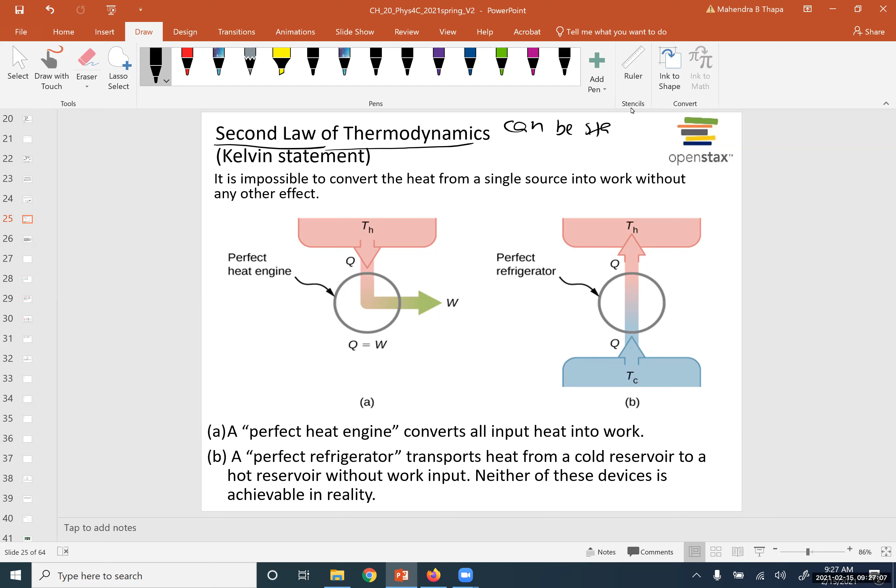I'm starting with second law. So you see here, second law can be stated in many ways. Okay. So right here it can be stated in many ways, but the main concern of second law is this.

Here the second law is that net heat flow is from high temperature to lower temperature without doing any external work.

Okay, it means heat cannot flow from low temperature to high temperature without doing external work. Okay, so in general heat flows from high temperature to low temperature. So it can be stated in many ways. The first statement is this Kelvin statement.

It is impossible to convert heat from a single source into work without any effect. That means we cannot produce this kind of perfect heat engine that converts total heat into work. So this is impossible. Okay, this kind of engine is impossible.

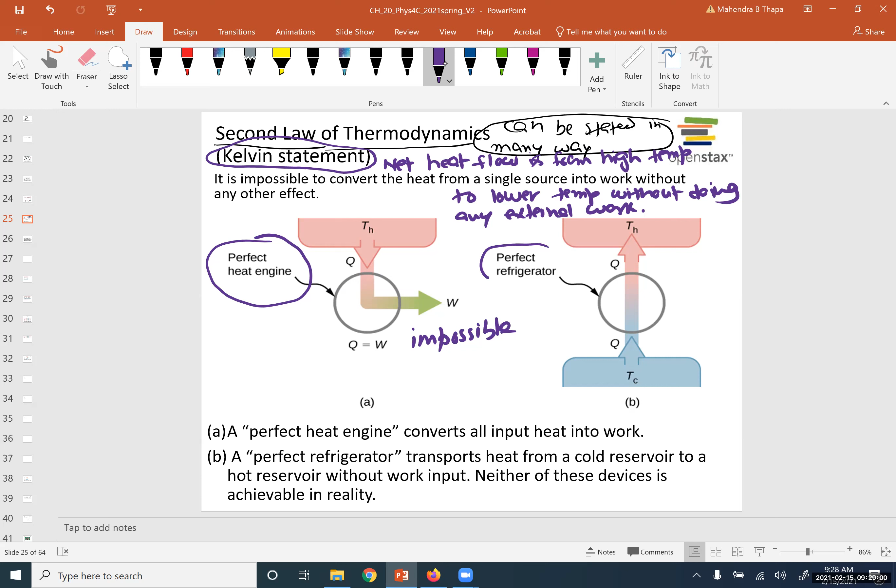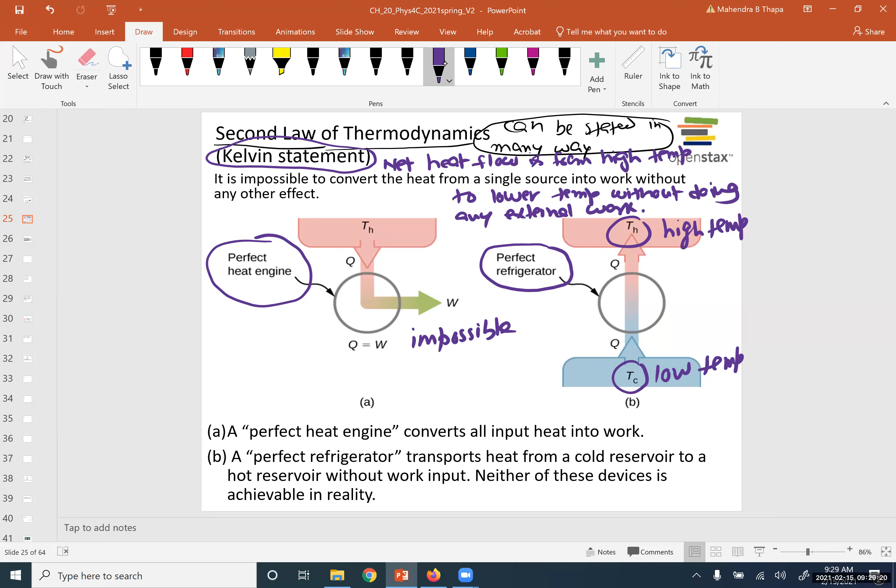Similarly, we cannot have that kind of perfect refrigerator that transfers heat from low temperature to the high temperature without doing extra work. Okay, so this means the 100% perfect engine is not possible. So this is basically talking about this thing.

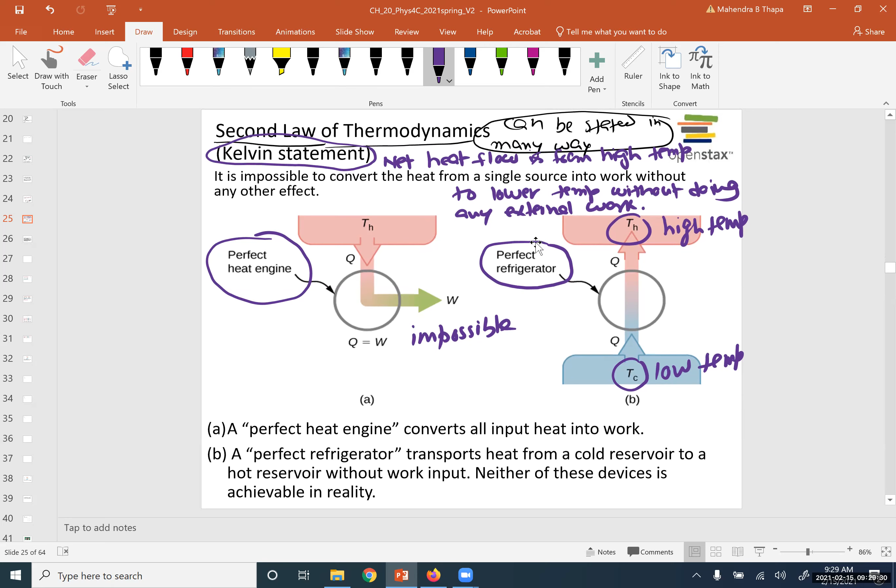Okay, another statement is called the Clausius statement. It says that heat never flows spontaneously from cold temperature to high temperature. Okay, so these statements are the same. They are not different statements; the meaning of both statements is the same.

So in summary, we can say a 100% efficient engine or refrigerator is not possible. You cannot produce this kind of machine.

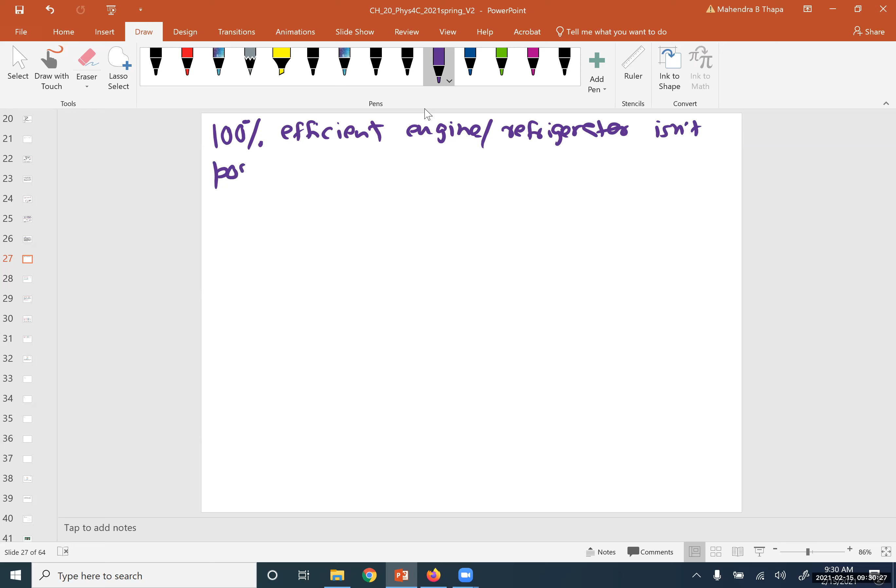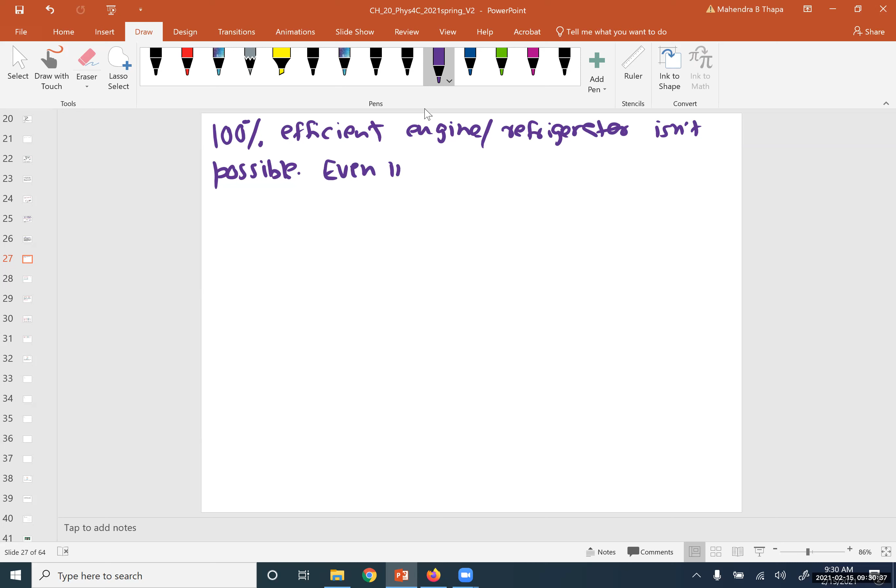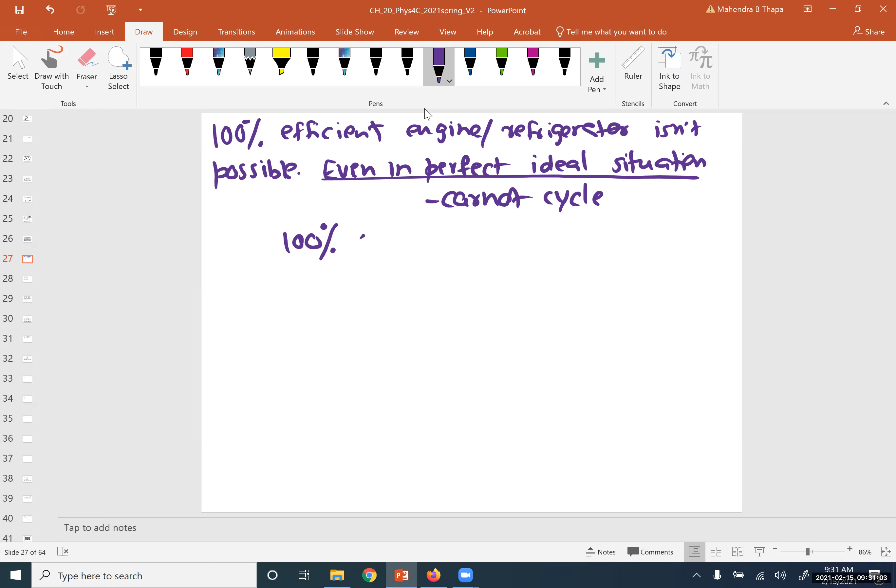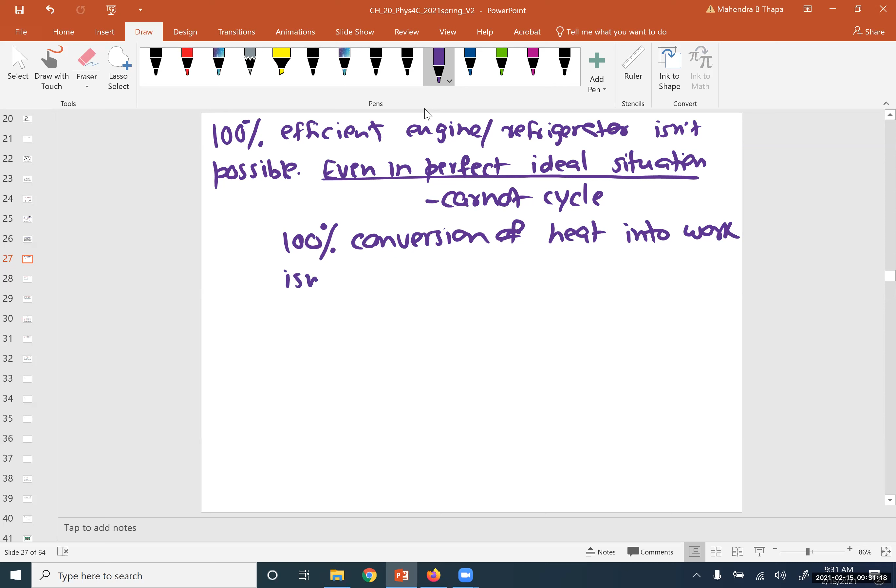Okay, so even in the perfect ideal situation, we come across this situation. This is called the Carnot cycle, Carnot engine. Even if we consider the perfect ideal situation, we'll see soon that 100% conversion of heat into work is not possible. Okay, this will not be possible. We come across this point very soon.

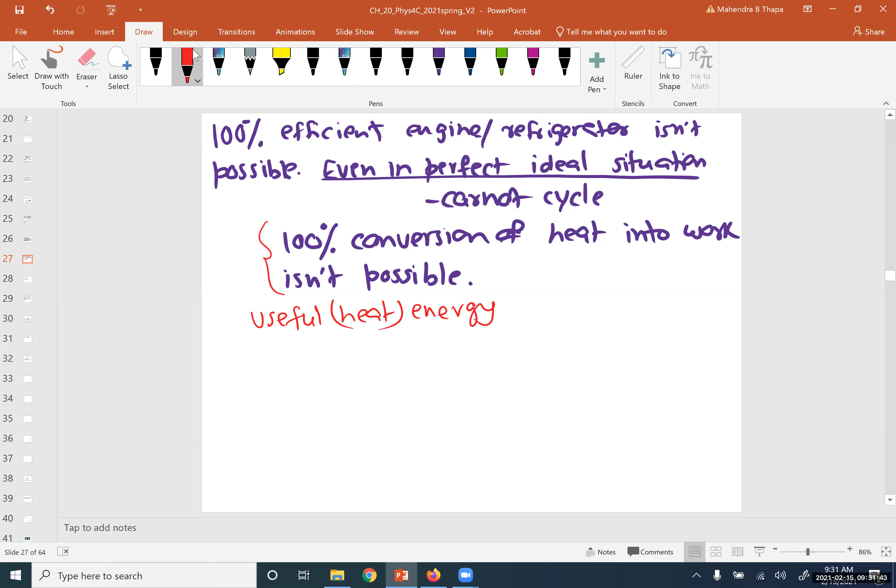Okay, so what we are saying is that the principle of conservation of energy still exists. It's always true. What we have, the total useful heat energy, gets converted: some is converted into work and some is converted into unuseful energy. Unuseful energy means this energy cannot be converted into work.

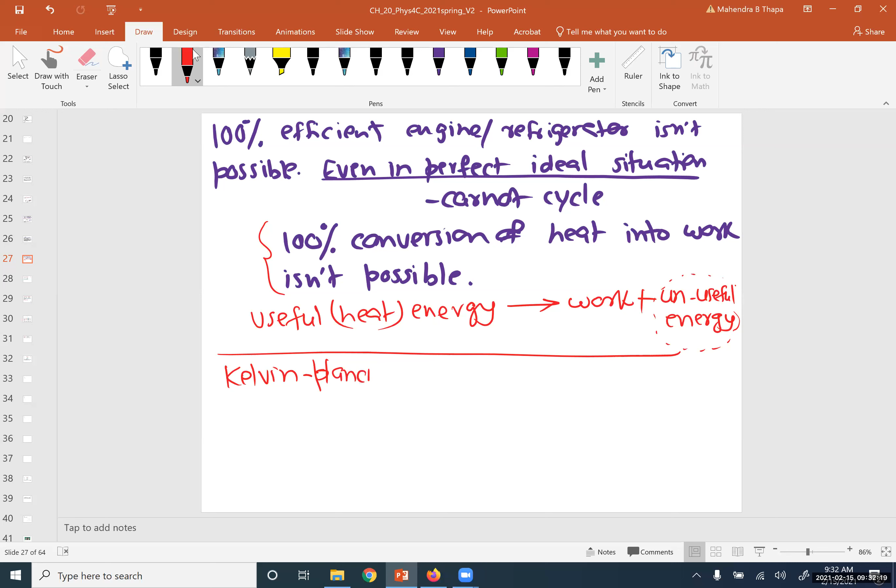Okay, so we have two statements. One we just saw is the Kelvin statement, or we also call it the Kelvin-Planck statement of the second law. This basically defines the heat engine.

And second, we just saw the Clausius statement that basically talks about the refrigerator. Okay, so both statements are equivalent. They are talking about the same thing, but they are only different ways to state it.

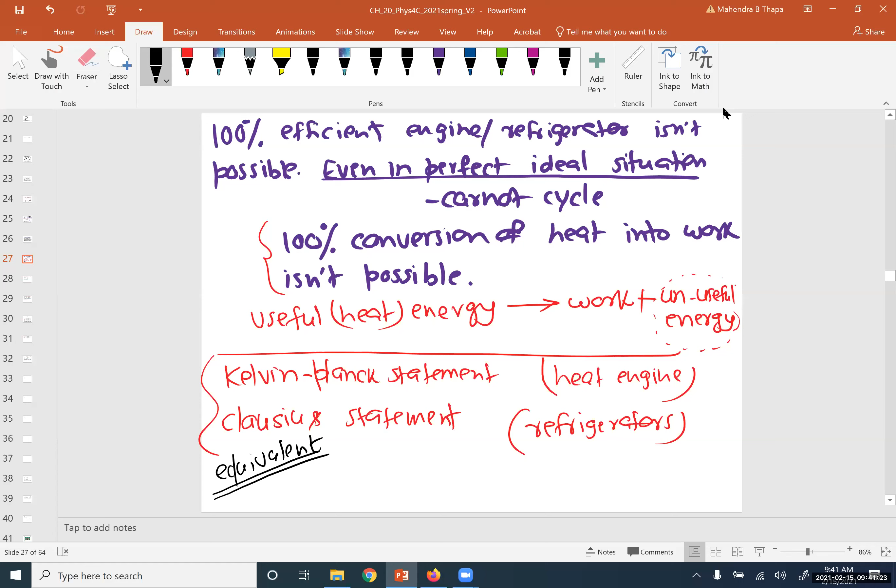Okay, so next we'll talk about the ideal situation of the Carnot engine. In this picture we combined a perfect refrigerator, meaning heat flows from low temperature to high temperature, and the other engine is the heat engine. If we combine the real heat engine and the perfect refrigerator, then according to our second law, this is not possible.

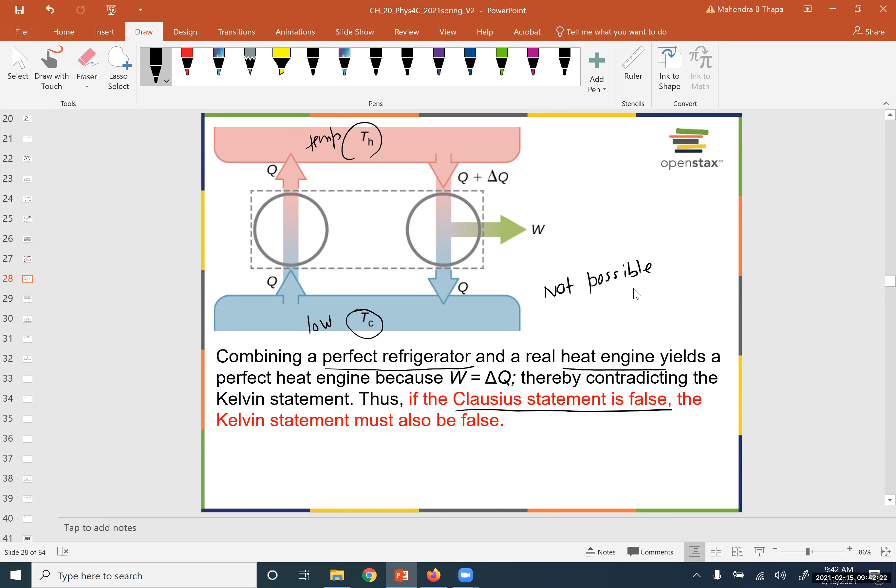This kind of engine is not possible because it will actually transfer heat from the low temperature to high temperature without doing any work on the system. So if the Clausius statement is false, then Kelvin's statement must also be false. This tells you both statements are equivalent in meaning.

Okay, so in this picture, two uncoupled engines, D and E, are working between the same temperatures. The high temperature and the low temperature are the same for both engines. So according to this picture, all reversible engines operating between the same two temperatures have the same efficiency.

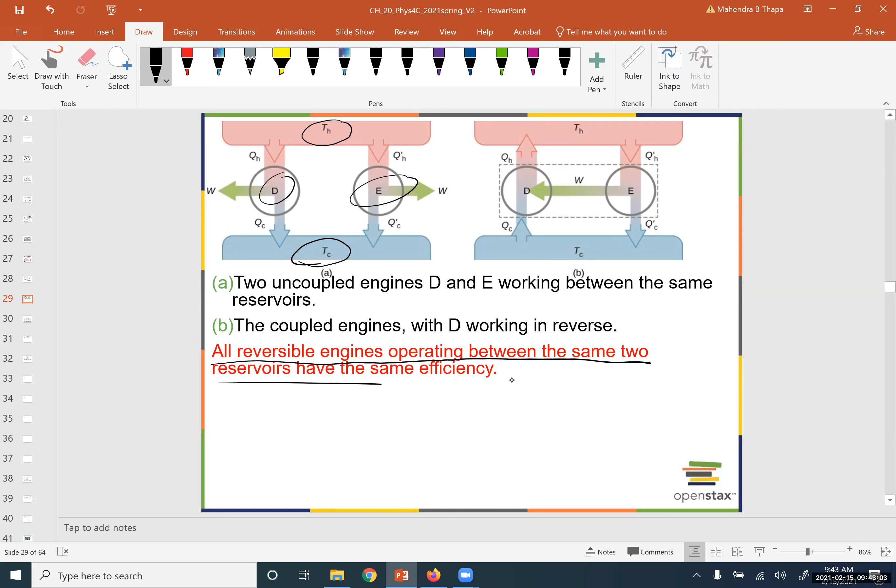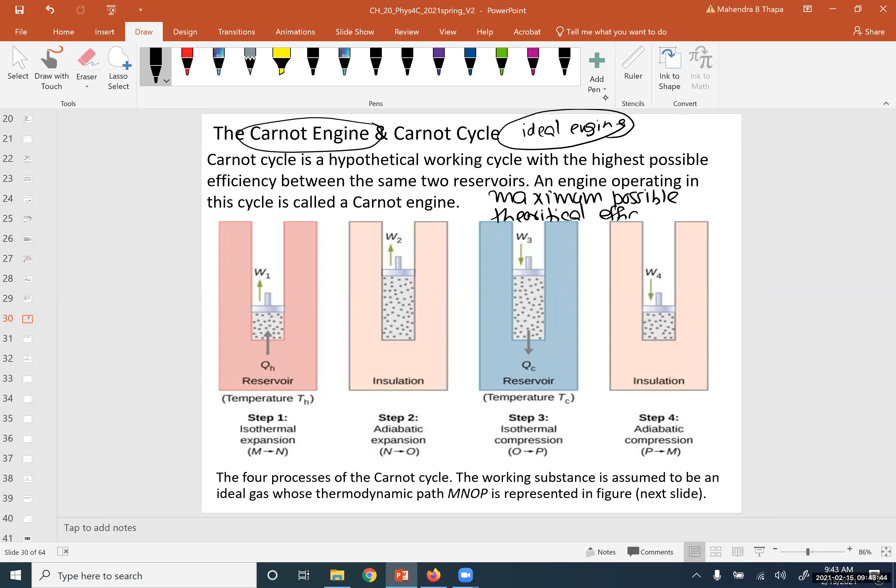Okay, so now let's start with the ideal engine, ideal cycle. This Carnot engine is the ideal engine. This engine will give the maximum possible theoretical efficiency of a heat engine.

So ideal engine means we are ignoring all the friction, meaning there is no friction between the cylinder and piston. We have a cylinder here, and this is a piston here. We are assuming there is no friction, and we are also ignoring heat loss in any other forms. Okay, so let's start this cycle, the Carnot cycle. It goes through 4 steps.

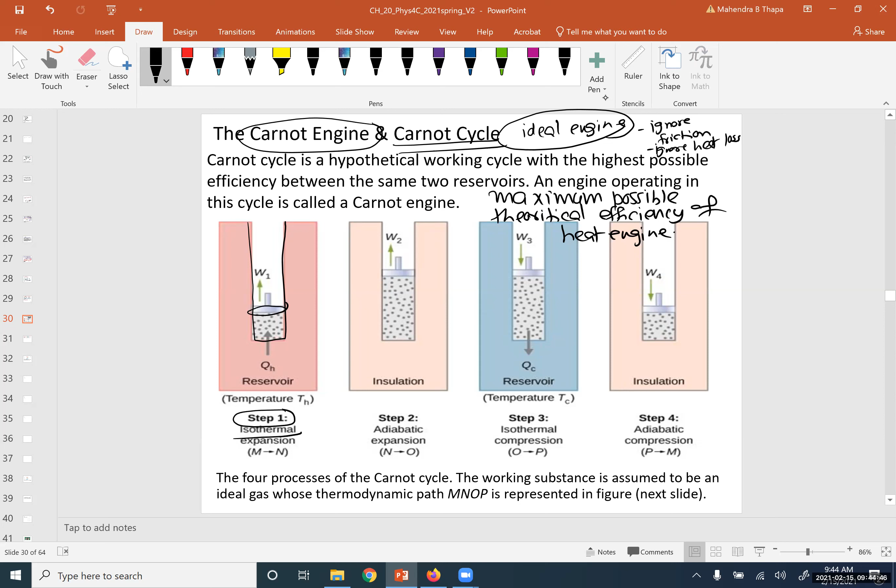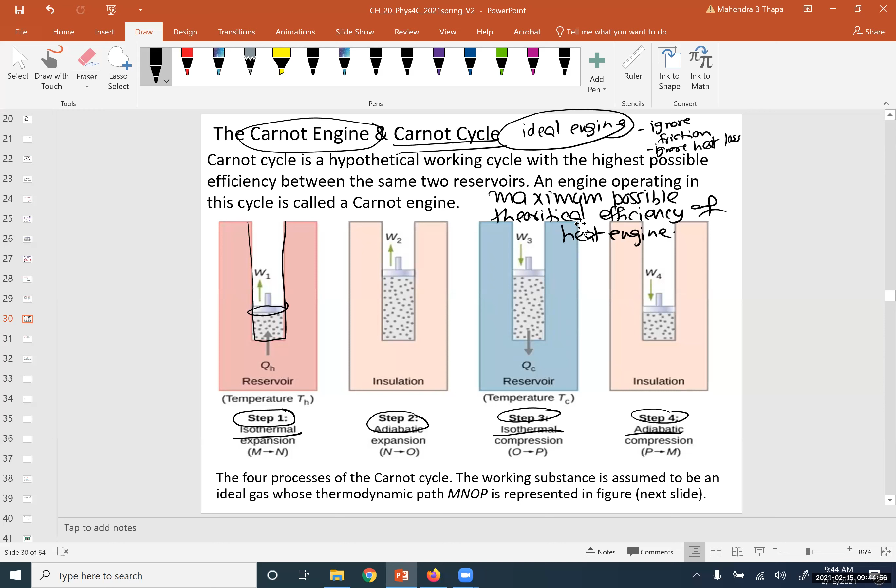So we're going to discuss all these steps. Step 1 is isothermal. Step 2 is the adiabatic. Third is again isothermal, fourth is again adiabatic. Okay, so let's talk one by one.

So in the first step, isothermal expansion, for the simplest example, we can say this is a cylinder with a piston. We are supplying heat to the system. Say the furnace has temperature TH. If we supply the heat, the piston will go up. So this is the isothermal process. We are supplying the heat, but this temperature remains constant.

In the second step, we call it the adiabatic expansion. So what does it mean? In this case, volume will increase. This expansion could happen, but we are not supplying external heat. So we put it on the insulated stand, so it will not lose the heat. In the first case we supply heat, so dq is greater than 0. Here we are not supplying any external heat, so dq will be 0.

Again, we use the cylinder with the piston. This time, the system of gas is actually going to lose heat to the atmosphere, whose temperature is called Tc. So it will lose the heat, so dq is less than 0. So this is the isothermal compression.

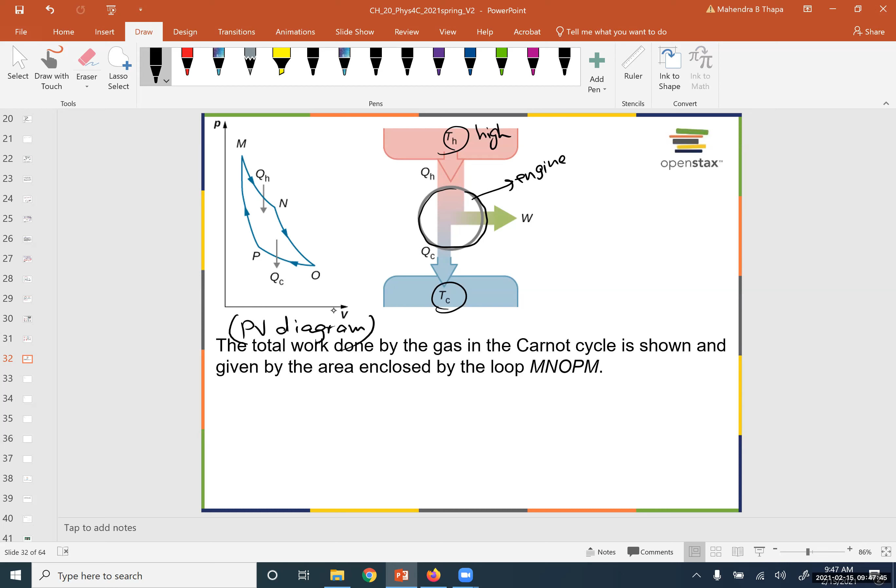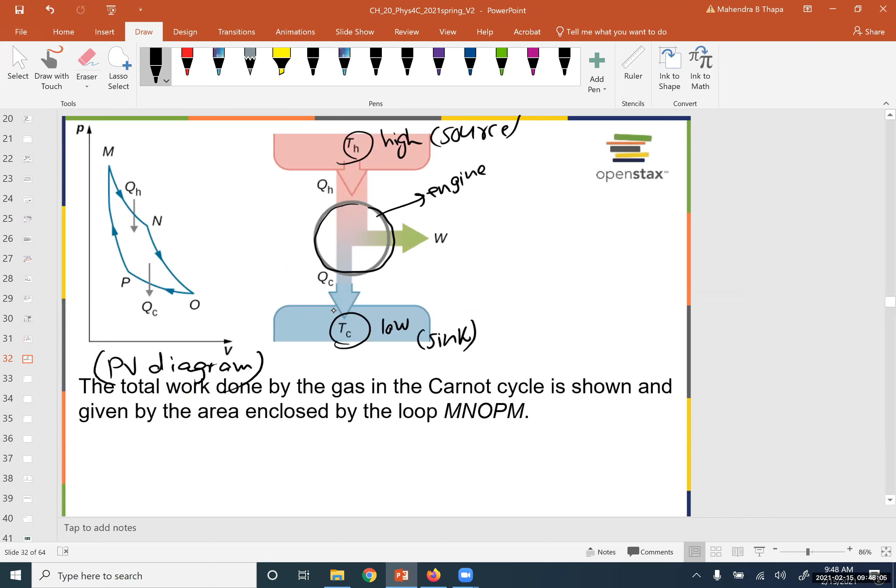This can be represented in this PV diagram for this ideal Carnot engine. This heat engine is working between high temperature TH and low temperature TC. This is the source temperature, and this is the temperature for the sink. For the simplest case, this engine in our case is the cylinder with piston.

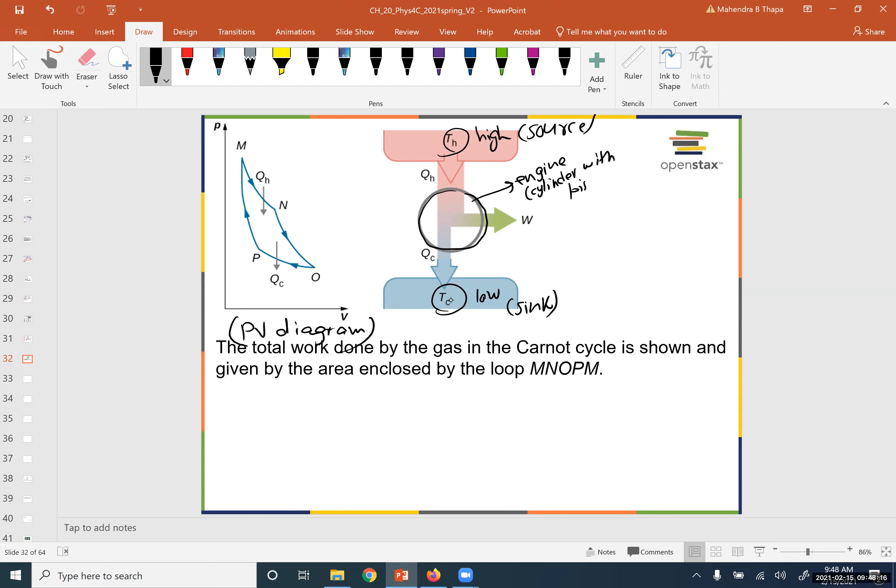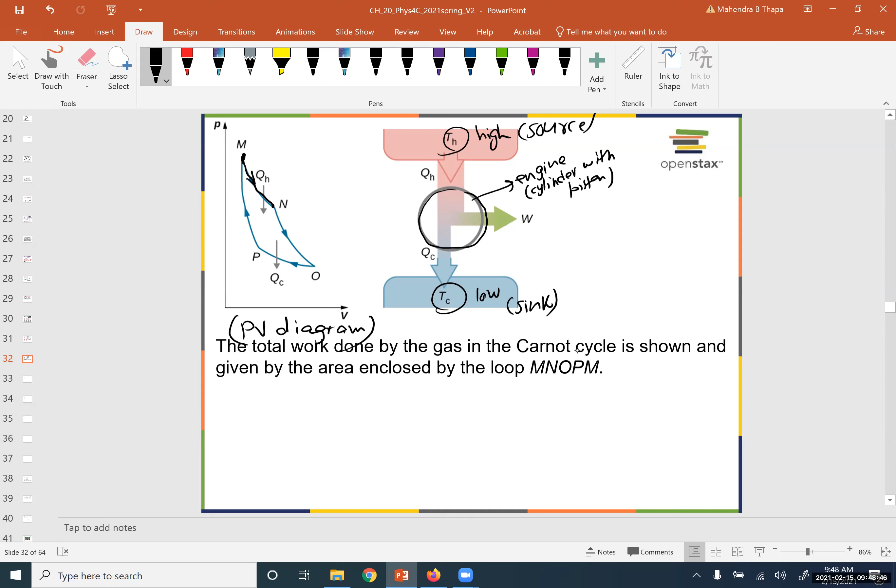In this picture, M corresponds to the state PM, pressure at point M, volume at point M, and temperature TH. N is the final state, Pn, Vn, and temperature TH. So MN represents the isothermal expansion, and we write QH as the heat supplied.

In this case, the change in internal energy is 0 because there is no change in temperature. But we have work: dW is greater than 0 for the section from M to N.

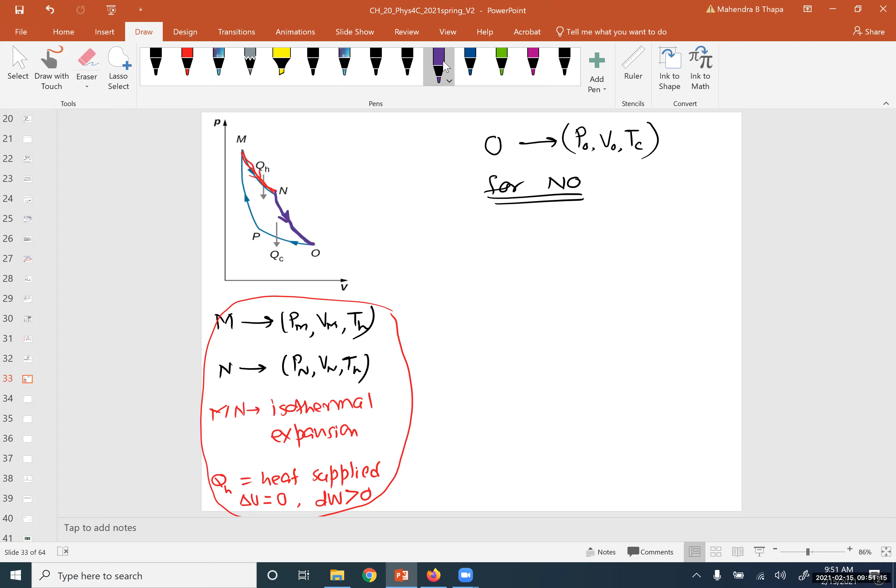For point O, the state is pressure PO, volume V naught, and temperature Tc. The path NO is the adiabatic expansion. In adiabatic expansion, the change in internal energy is not equal to 0, but the heat supplied dq is 0, and work is greater than 0. So this is for curve NO.

Now we move to OP. Point P corresponds to pressure PP, volume VP, and temperature Tc. OP is the isothermal compression. It will reject heat, so QC is the heat rejected to the sink.

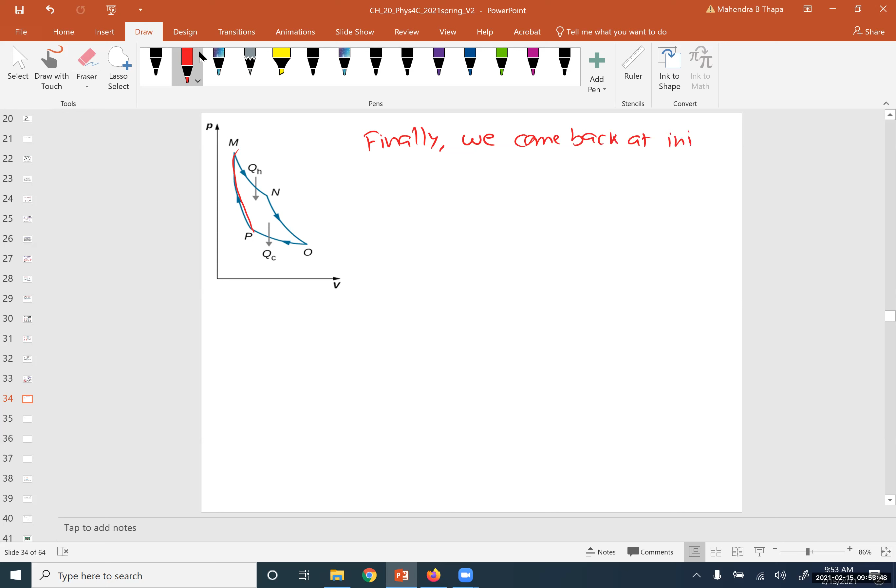Okay, so we are now here again. We are here from P to M. Okay, so for point M again we come to the initial state. So finally we come back at initial state M. So M is PM: pressure is PM, volume is VM, and temperature is TH, right? It's high. It started with a high temperature.

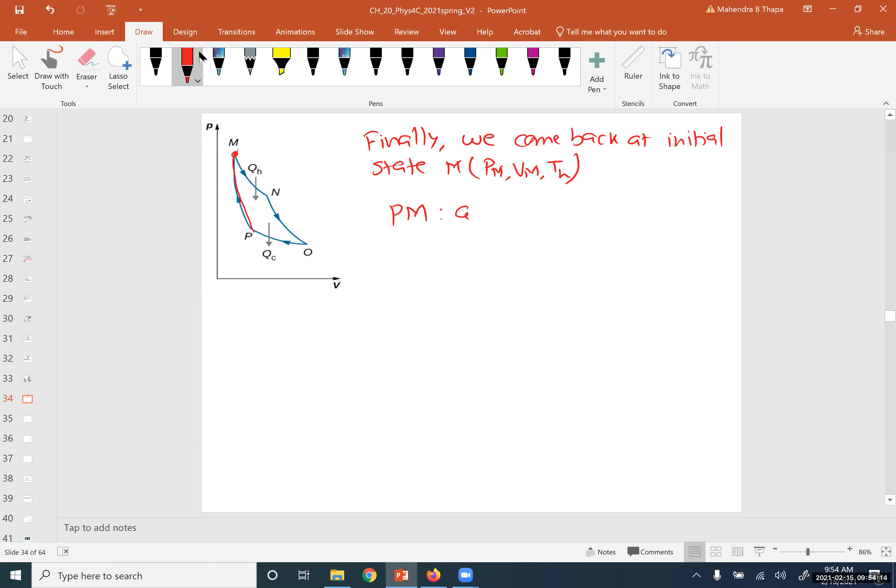Okay, so if this is the case, you know that PM is the adiabatic compression. For adiabatic compression, we are not supplying any heat, so dQ will be 0. This is the compression, so your work done will be less than 0, and there will be a change in internal energy, so this should not be equal to 0. So this is the explanation about the curve.

So the area under this curve MNOP, this area, will give the total or the net work done during all four processes.

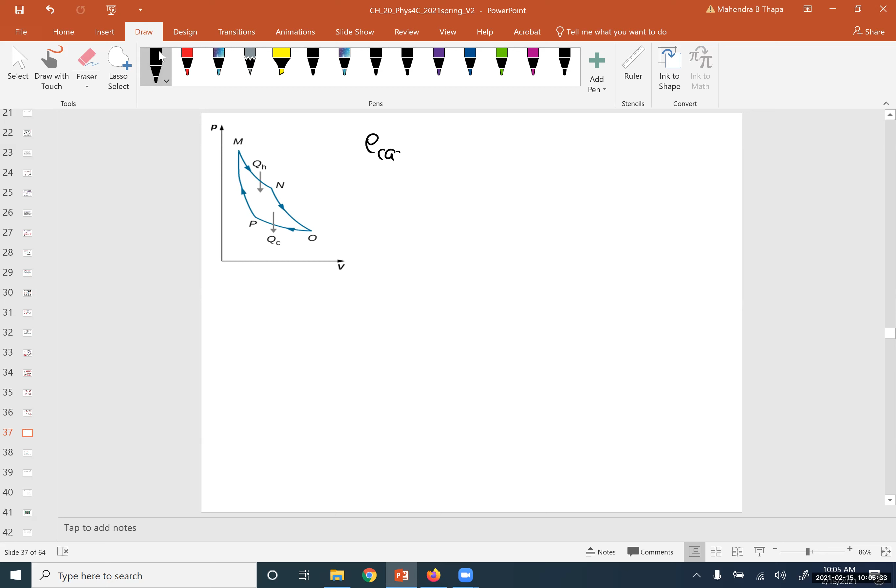Now we are using the concept of efficiency. As before, we can write E Carnot equals total work done over QH supplied. So this will be QH minus QC over QH, which equals 1 minus QC over QH. This is the efficiency of the Carnot engine. We haven't done anything new here; we have used a similar equation before. So our main concern is how to find it.

So to find this, QC over QH at first. Our whole goal is this. We have these results for QC and QH. QC is this value and QH is this value, so we can plug those in here. Let's try this for now. QC over QH equals nRTc log Vp over Vo...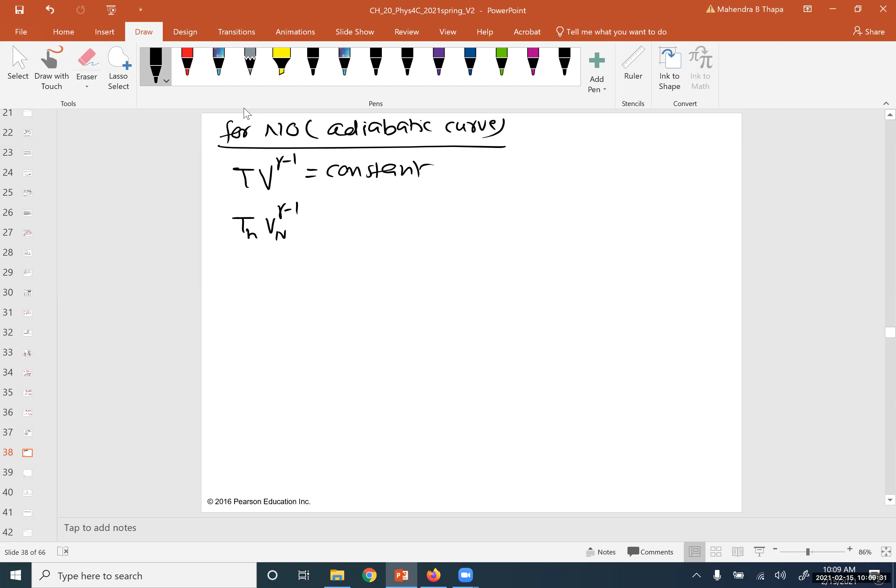NO, which is an adiabatic curve. Okay, so for this curve we can write TV gamma minus 1 equals constant. Okay, so this gives you that we can write TH Vn gamma minus 1 must be equal to TC V naught gamma minus 1. Similarly, we can write for PM, which is also an adiabatic curve. Again, I'm using the same equation. The same equation will give you TH Vm gamma minus 1 equals TC, for the point P, Vp gamma minus 1.

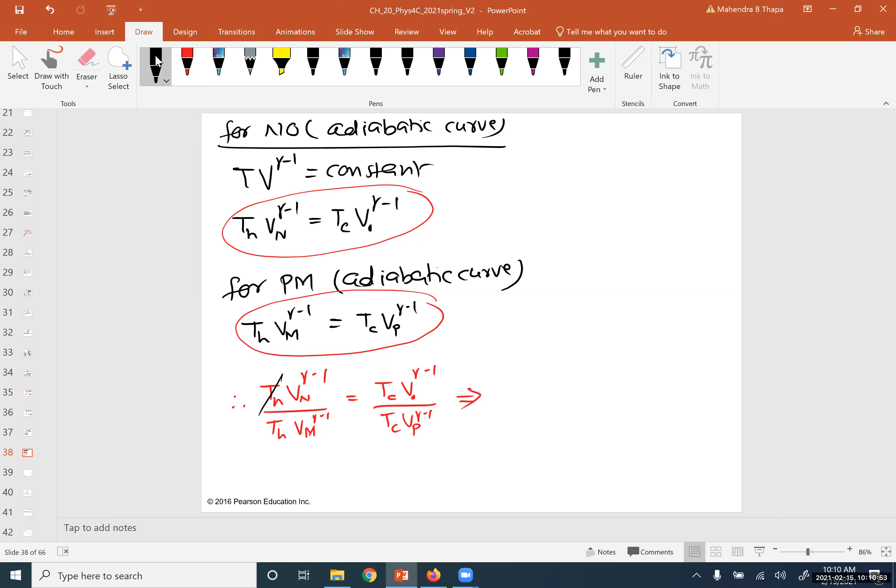Okay, so I will use this and this, and I'm going to write this as TH Vn gamma minus 1 over TH Vm gamma minus 1 equals TC V naught gamma minus 1 over TC Vp gamma minus 1. So these cancel out. So this gives you the relation between the volumes, because Vn over Vm to the power gamma minus 1 must be equal to V naught over Vp to the power gamma minus 1. So we can write this as Vn over Vm equals V naught over Vp, right? So we have this result.

So I can combine this result and put it back over here in this part. I'm going to replace here. Okay. If I do that, then I will find QC over QH equals minus TC over TH log Vn over Vm over log Vn over Vm. So this will cancel out. So we are left with QC over QH equals minus TC over TH. Okay. So if we just take the magnitude, we can write QC over QH equals TC over TH. Okay. So this will be true for the Carnot cycle.

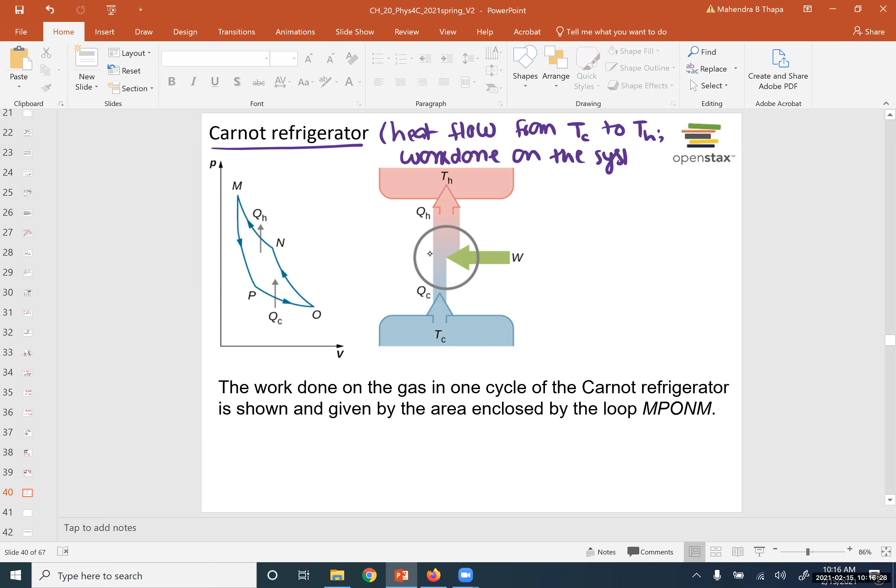So we'll talk about Carnot refrigerators. In this case, just the reverse thing will happen. Meaning in this case we need heat flow, the net heat flow, from low temperature TC to high temperature TH. But in this case we need work done on the system. Be careful about that. Not work done by the system, work done on the system. Okay. So this point is important, because before we had to supply the heat, while in this case we have to do the work. So we need to do external work on the system. Okay. So in this case, just the reverse of the Carnot heat engine will be possible here.

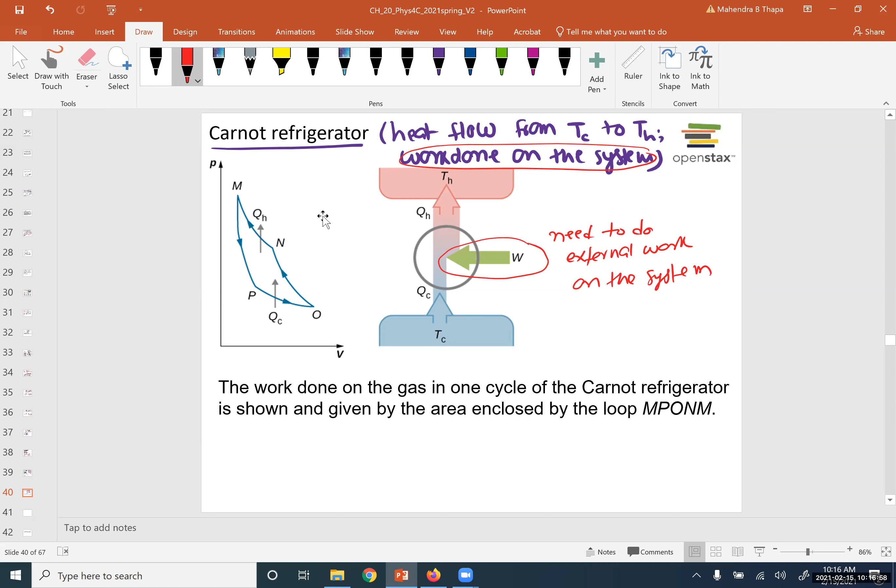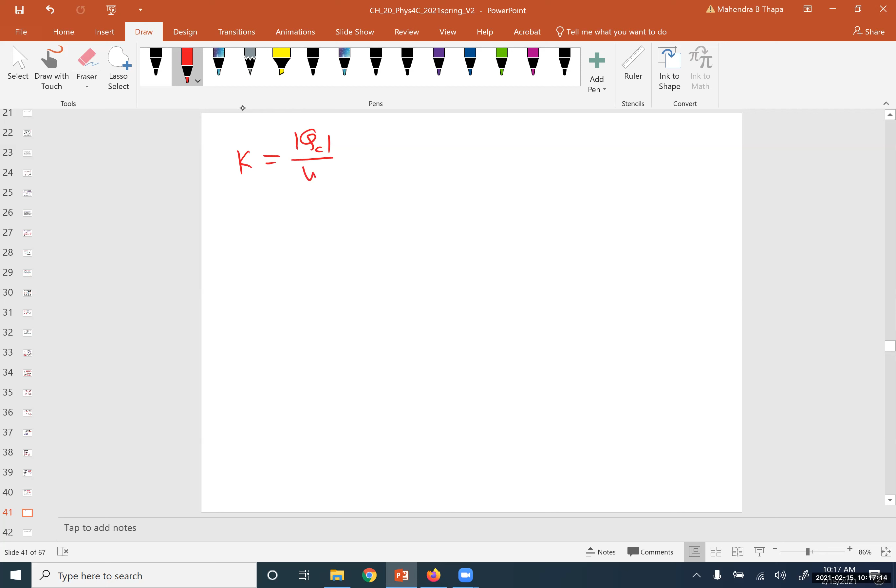So in this case, as before, we define the K value equals QC over work done. This equals QC over work done, which is QH minus QC, okay. So you define it that way. So you know that K is called the coefficient of performance, okay. If we repeat similar steps as for the Carnot engine,

we can show that this K value, K for the Carnot, if we repeat the same process, will be equal to TC over TH minus TC, okay. So TC is the temperature of the sink, and TH is the temperature of the source. So we can use this equation to solve the problems for the Carnot cycle.

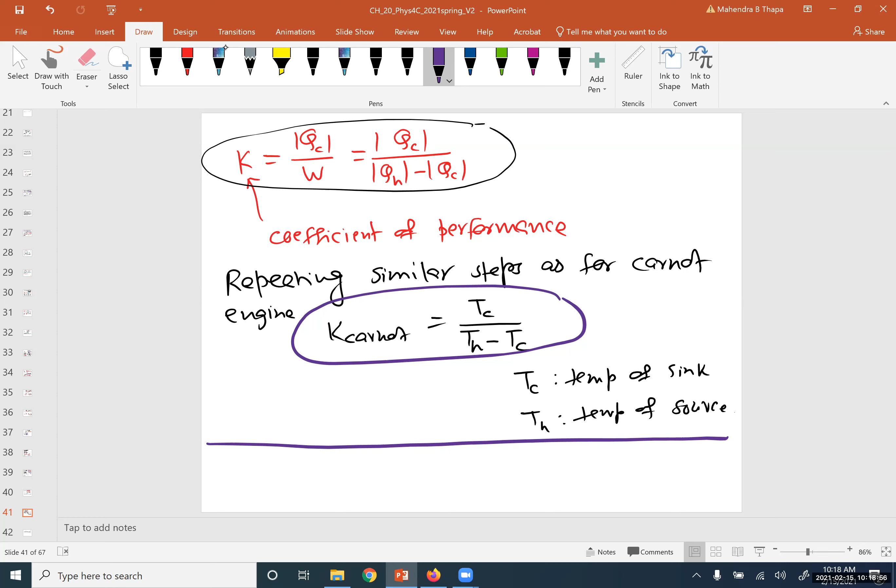Okay, so every time we are talking about the Carnot engine or any kind of engine, we can say that no engine can be more efficient than a Carnot engine operating between the same two